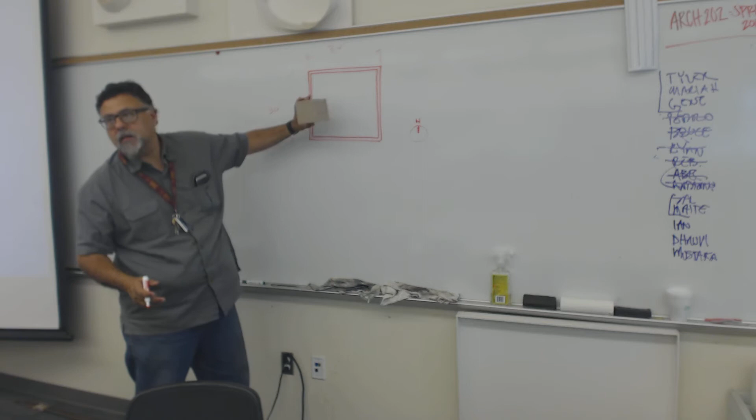So which direction does my entry face? So it's sitting like that. Is this the northeast corner? Yes, it is. This is the southeast corner. So my cut is on the northeast corner of that. So when I come up here and look, this is north, that's east, this is the northeast corner.

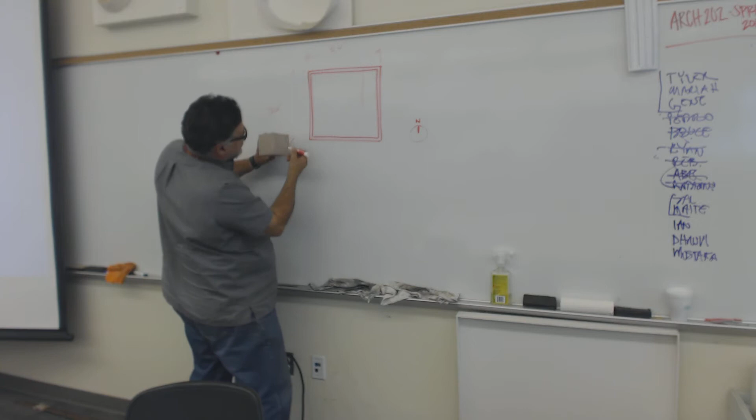So now I'm holding this and it's sitting like this. It's 5 feet going from east to west. So this is east, this is west, so it's 5 feet over this way. I take and measure over about 5 feet, and I draw the line. Then going down this way, it's about 20, so it's at about the third point, and that's about where my porch is.

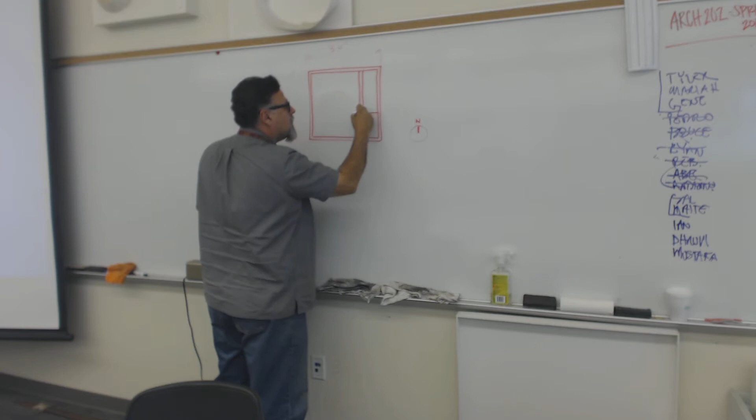So the next thing I have to do is give it a wall thickness. So here's this, and that, and then I got a wall thickness here, and a wall thickness here. Now this line's no longer there, because there's a floor there. This one comes to the outside.

And if you haven't already done this in your 121 class, you will be doing this. I know Madi covered it today. How many of you are in Madi's class? So you guys did do this today, right? Where you took the pen and decided where the outline was, then used the felt tip marker on the inside to poché it.

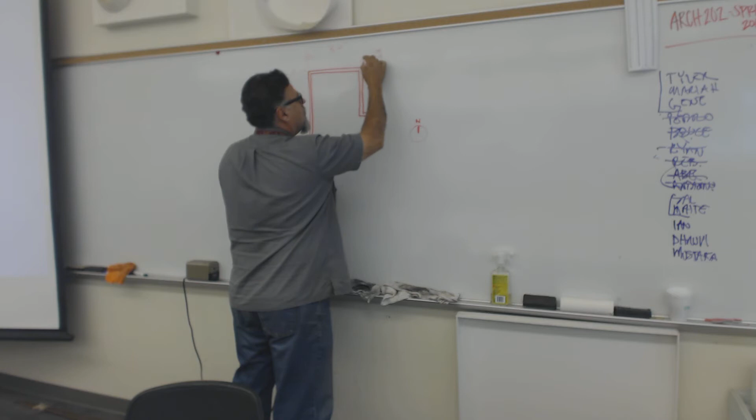Okay, so there's my porch, right? It's 5 feet from there to there. So I'll draw that dimension: 5 feet, and then I made it 20 feet this way. Why did I pick 20?

They gave those the dimensions. Yeah, but why 20? 10 plus 10 is 20, plus 10 is 30. It's the 1/3 point, see? So I didn't arbitrarily just pick a point, I tried to do it to where it was visually referencing what's going on there.

Okay, so what I want you guys to understand is the impact that this has had on the space inside of it. So now let's say I do another porch and put it at this corner. I'm going to go here, it's 5 feet deep. This is my sunset porch.

So now the two porches that I've created have had an impact on the inside, right? If you were to walk in here, your mind's eye would essentially be creating this imaginary line going across here, and it would be creating another potential imaginary line here, or it could use this as the new volume, and it could just imagine a line there. Because say I put the door here, and I walk in, when I turn the corner, from that corner back, it's going to feel like one room.

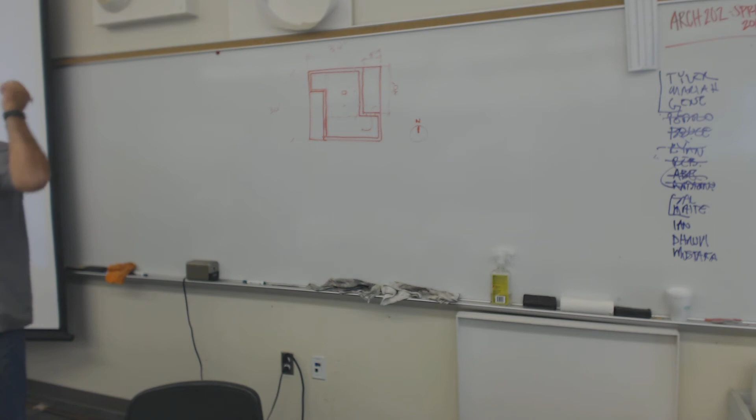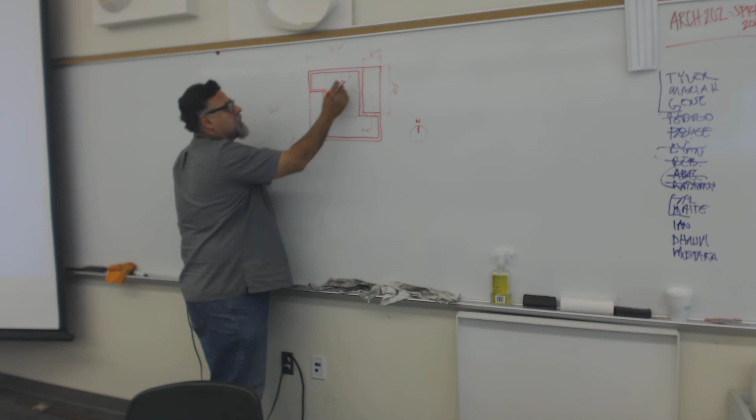Is that arbitrary? Did I just close my eyes and pick a point in space? I didn't. I made a decision—halfway, there's the podium. I could have said, instead of going all the way to there, that maybe the podium is halfway between here, in which case it would end up there instead. Do you see how that works?

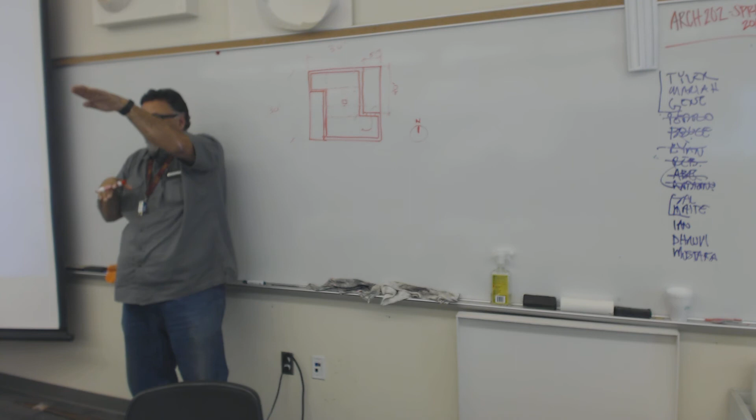Likewise, you guys are going to have to put a piece of art on a wall somewhere, right? And the piece of art has to be on the east wall, and straight across from it you have to have a window at the same height, because the sunset on the equinox is exactly horizontal and straight east-west. So what's going to happen is when the sun sets, if you have a window here and a wall painting mounted here, the last rays of the sun as it goes down are going to come through that window and light that painting.

But now where do you put the painting? Where do you put the window? Students would normally struggle with that and say, I don't know, I just put it somewhere in there, right? Well, one way to look at it is to analyze this as a space and say, I'm going to center the painting on that space, and then I'm going to put the window so that it centers on the painting. Then the things are not arbitrary.

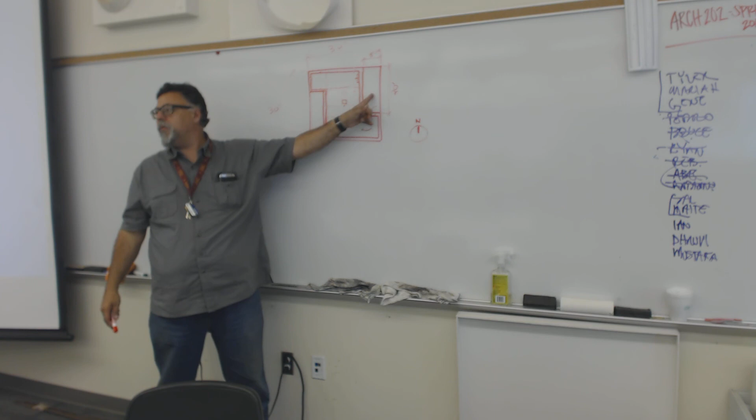You notice how everything is kind of deliberate—it's thought about. So these are the things I'm going to ask you guys to do. I'm going to ask you to create your entry porch following the rules, create your sunset porch, and that one has looser rules, and then start to analyze the space inside.

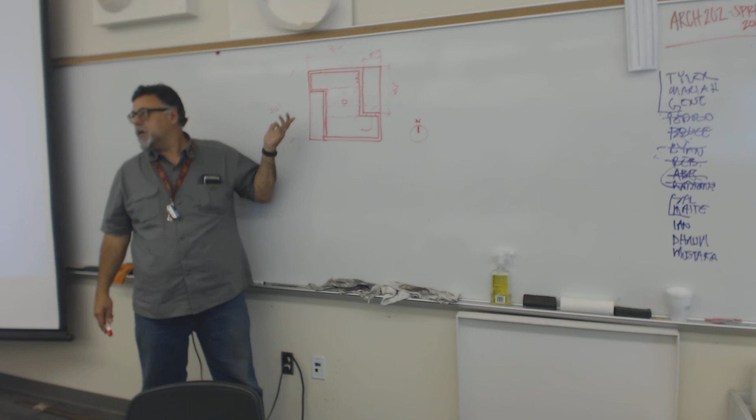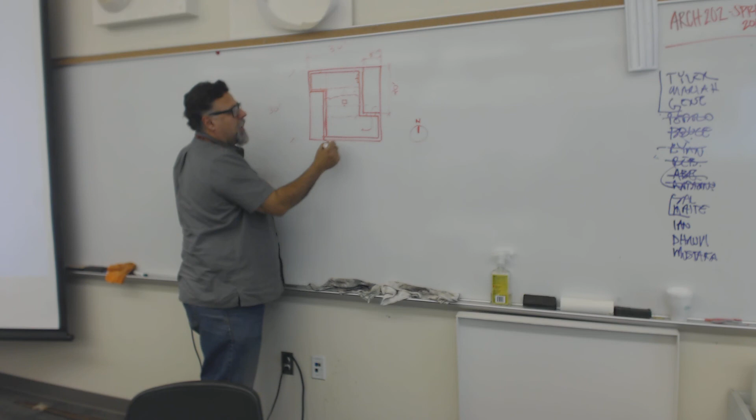There's no one way to analyze the space inside. I could say this is a space, that's a space, and that's a space. I could even say there's a space that overlaps that one. It's not some weird thing here—I'm using edges that exist to define where the spaces are inside. I'm not just arbitrarily picking points and saying there's a space. I used that corner, I used the distance between these two things, I used that corner, I used the width of that space.